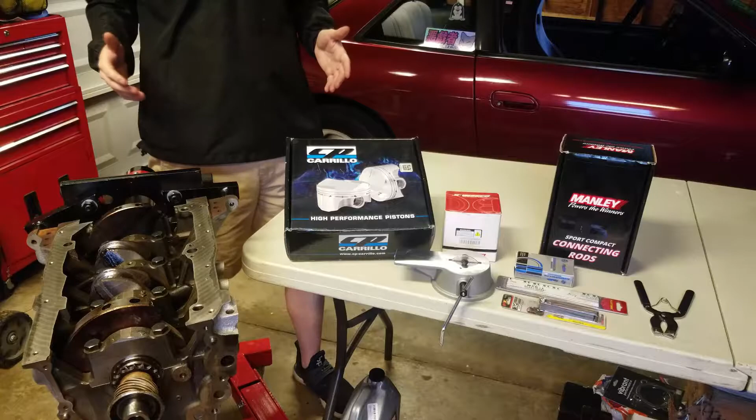This is part 3 in the KA24DE Turbo series, and as you can see we are back in the garage today working on the block that we were working on in part 1. If you haven't seen that, go check it out. We installed our crankshaft into our block and did the Plastigage measurements of the clearances between the block and the crank journals. Today we're going to be doing a little bit more of that on these Manley rods, but first

we are going to go ahead and get our rings filed for our new forged CP Carrillo pistons before going ahead and putting on these forged Manley rods onto the pistons. Then after that, once we have our pistons and rods fully assembled with our filed rings on there, we're going to install them in the block.

Hopefully by the end of today and the end of the video, we can get some beauty shots for you of the CP Carrillo pistons moving up and down in the cylinder bore of the block. So I think that about wraps it up for what we are looking to get accomplished today. Let's move right into a scene. We're going to be opening up this box of CP Carrillo pistons and getting into our rings.

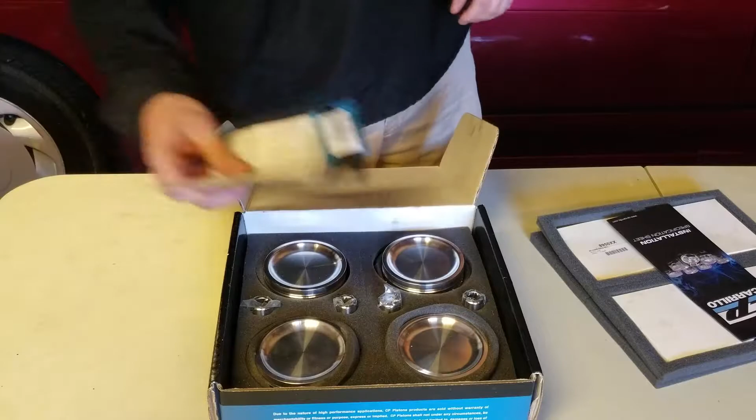The only thing that we need is our installation specification sheet and our rings so that we can go ahead and get those filed. So put away this box, get our rings out, and start working on finding these measurements and get these rings filed. We will see you in a second.

Alright, we have gotten our ring packages laid out on the table, and as you can see, we've gotten things organized in a manner that makes sense to us. So from the front of the engine to the back, we have 1, 2, 3, 4. These are the cylinders, and on the left side over here, we have top, second, and oil. This will associate to each ring so that we can lay them out and stay organized. On this same sheet as well, we have the clearances that we are aiming for on our ring gaps.

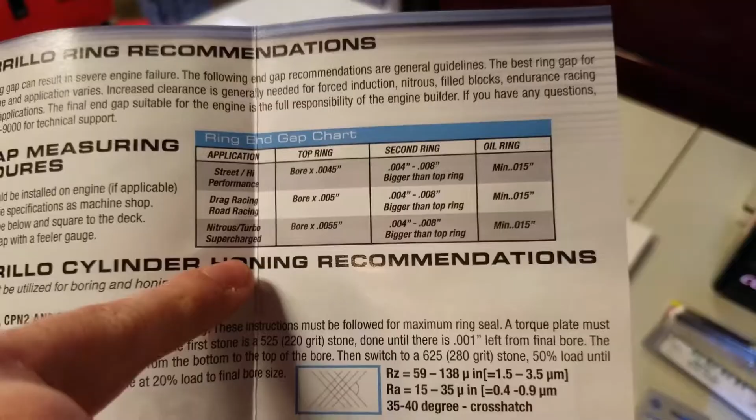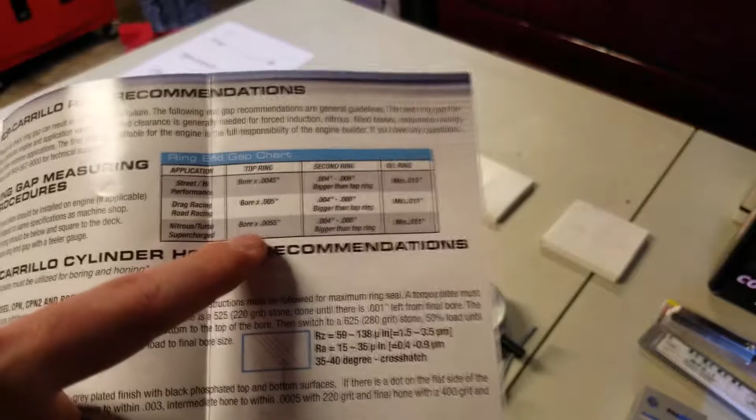And in order to find those clearances, as we stated before, we came to this little bit of the installation spec sheet paperwork. And as you can see, we will be working with a nitrous/turbo/supercharged installation. And to find our top ring gap, we would take the bore size of the engine in inches. You have to convert the bore size from millimeters to inches. Make sure you do that, because if you do not, this measurement will be incorrect. So take your bore size in inches times 5.5 thousandths, and that will give you your top ring clearance.

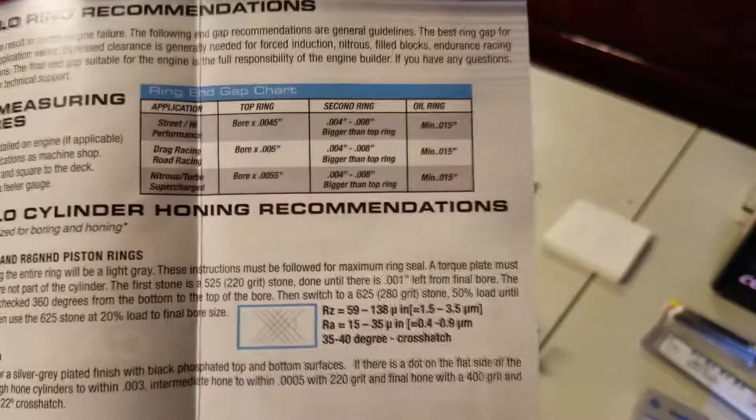For the second ring, just add anywhere between 4 thousandths and 8 thousandths to the size of your top ring, and that will be the size of your second ring. We went with 6 thousandths right in the middle, so we hope that will be perfectly fine. And then for your oil ring, a minimum of 15 thousandths is what you will be looking at for the clearance on that. So with that aside, we can open up one of these packages to see what is inside.

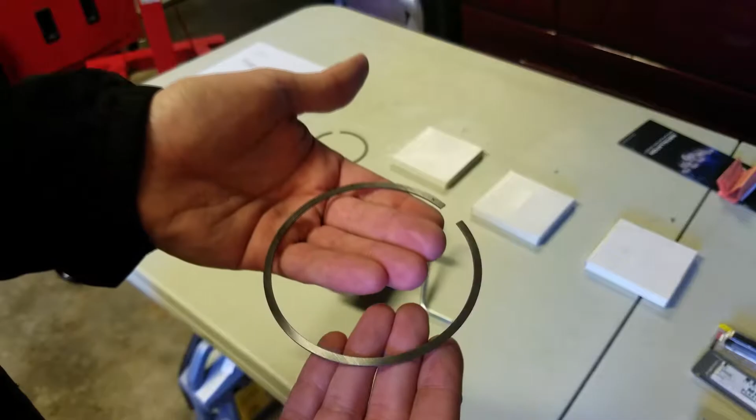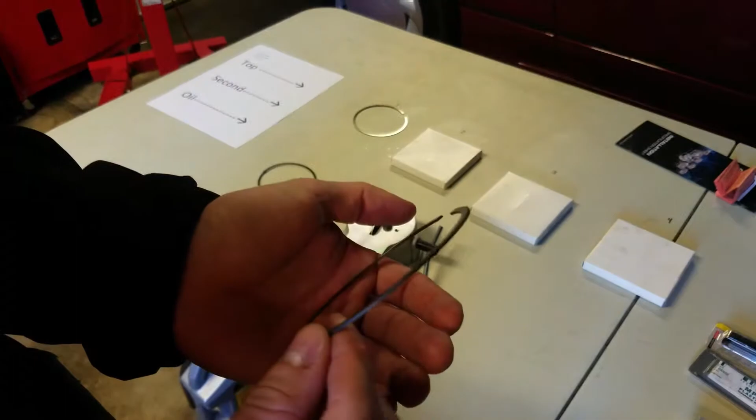So with the camera off, we went ahead and confirmed the rings are what we thought they were. This shiny ring is our top ring, and from what we understand, this is non-directional, so it does not matter which way is up when installing these onto the piston. The much thicker ring and the more dull ring of the bunch, it almost has like a graphite or graphene finish to it. This is our secondary ring.

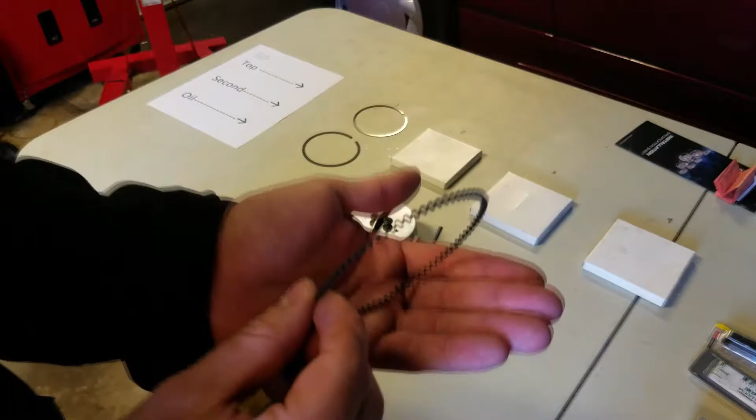Our third ring, hard not to distinguish from the others, is our oiling ring. And then lastly, we have these two very thin rings. These are what are known as oil rails, and these go on either side of the oiling ring.

So now that we have this set up in the way that we want to organize them, let's go ahead and move to getting the gap correct on this top ring. So these come gapped from the manufacturer, but we need to double check their specs. Typically, you will have to do some filing on these rings. Sometimes you can get lucky and they will be in spec, but let's go ahead and make sure it is.

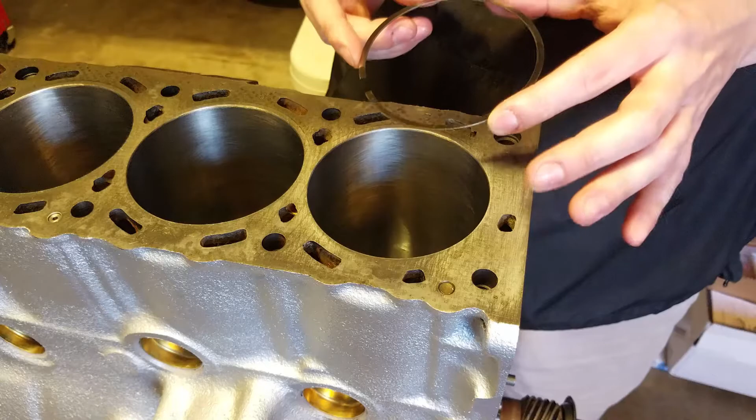So in order to install a piston ring for measuring the gap, simply push one side of the ring up against the cylinder wall to compress it, and while doing that, very, very gently push it down into the lip of the cylinder bore until it holds on just like that.

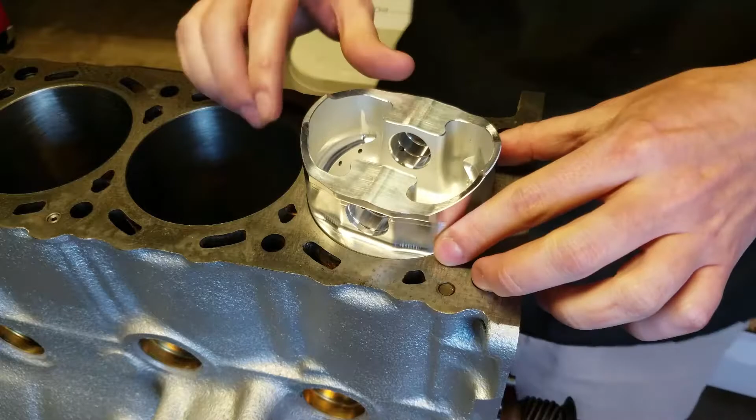With the ring compressed in the cylinder wall, we can take our new pistons or old pistons, it doesn't matter. We simply want to put it on top of our ring like that and push it down into the cylinder bore about an inch. And you want to make sure and go around the entirety to make sure that it is square in the cylinder bore.

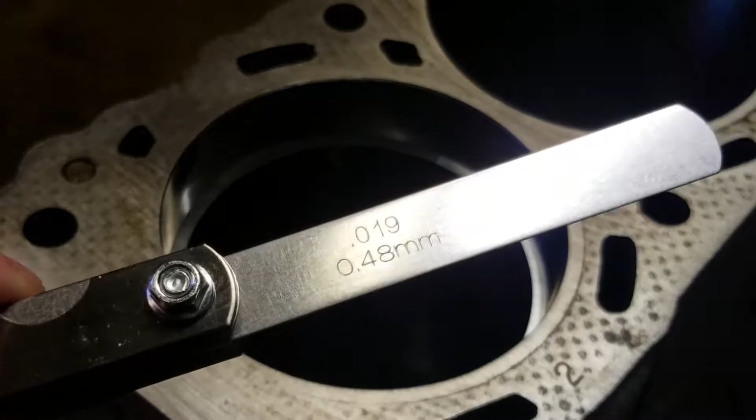Now, with the ring properly installed into the cylinder bore and ready for us to take a measurement, we'll go back over to our piece of paper and see that the top ring requires a 19 thousandths gap. With that in mind, we can get our feeler gauge and see we have the blade for 19 thousandths.

We'll simply attempt to slip this blade in between the gap right here on the piston ring, but as you can tell, we simply cannot push this feeler gauge blade into that gap, which means that we need to file it down some.

So getting ready to file this top ring to the specifications that we need, we're going to go ahead and show you some techniques that we picked up while watching some Real Street Performance videos. A lot of the knowledge that you will hear throughout this entire engine build series comes directly from them. They have a track record for really well-built engines and really fast engines, so that word is kind of the gospel for me at least.

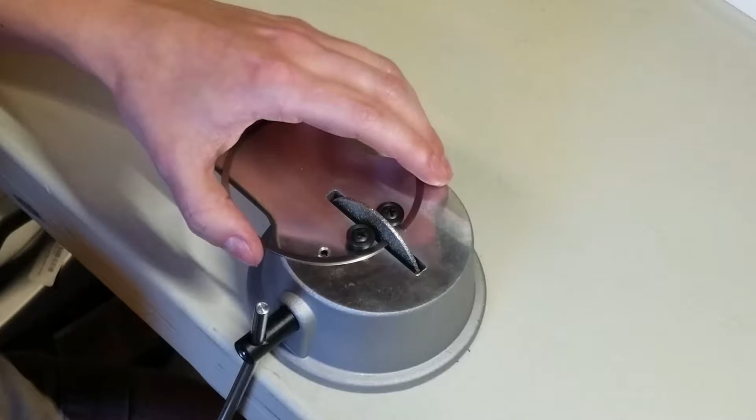The correct orientation for a ring to be filed is to place the gap over these two pins right here, then pull it back against it for support. When filing rings, you don't want to compress these two edges into the ring filing disc. Instead, you want to simply rotate one side of the ring so that one side is being filed. You don't want to file both sides, only one side of the ring.

Make sure this side of the ring is squared up as best as possible with the filing disc. And when filing, you do not want to rotate the filing disc away from the ring. You want to give the ring as much support as possible and file towards the ring as you are loading it up against the filing disc.

So we'll really quickly show you what that looks like. Simply hold the ring up against the filing disc and rotate it back, putting very slight pressure on the ring itself.

And now with that done, we can go ahead and take this back over to the block to square it up inside the cylinder bore and check once again with the feeler gauge if we have the correct specifications. So just like we did beforehand, we'll load it up on the side of the cylinder wall, being careful when compressing it. Only catching the lip just enough. Square it up with our new piston.

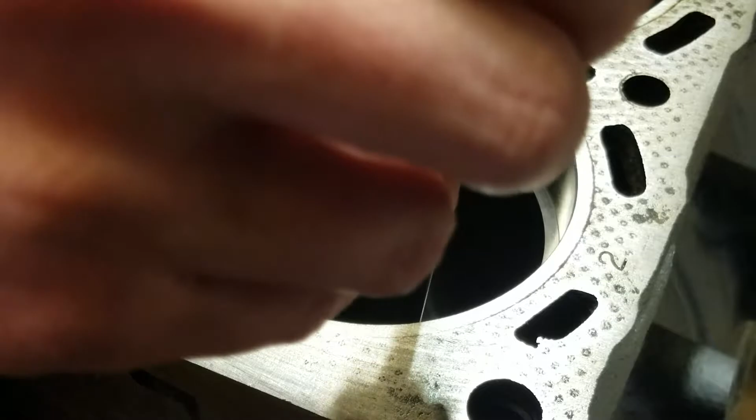And then once again, we can check with our feeler gauge whether or not that gap is correct. And it is not. We're getting close, but it's not there yet. And unfortunately, this process is very tedious.

You want to take away little bits of the ring gap at a time, or else you're going to overshoot it, and then you will have to purchase a new set of piston rings. And from what I'm aware, they're not that cheap, so it's definitely a bummer if you go ahead and smoke one of these piston rings. So we're going to go ahead and do that filing process a few times.

Then in a few moments, we will show you what the feeler gauge looks like and how it should fit in the gap with a correct clearance. Okay, so we've made about a dozen trips back and forth while getting this top ring right here gapped properly for this piston.

But a word of caution to those of you who may be doing this and using this video as informational. I accidentally went a little too ham on this ring and gapped it about 1/1000th over on this cylinder bore. So luckily, because we know that all of these cylinder bores, even though they were brought to a machine shop, are going to be still a couple thousandths out from each other. At least there's going to be a difference of a couple thousandths between each cylinder bore.

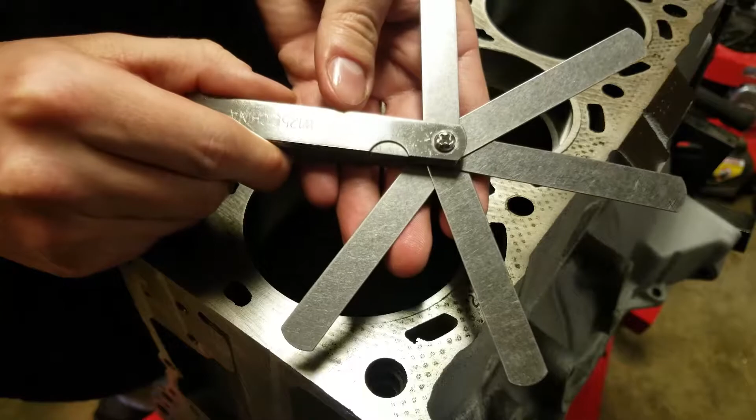Luckily, we were able to take this to cylinder number 2, do the exact same thing, and install it in here with a little bit of persuasion and a squaring up of a piston. And as you can see, we've also taken out a bunch more blades on our feeler gauge so that next time we do the top ring on this first cylinder, we can sneak up on it a little bit better.

So now this piston ring on cylinder number 2 is 18 thousandths. If I can get the light to reflect correctly, there we go. Our 18 thousandths feeler gauge is comfortably sliding into the gap on that piston ring, but our 19 thousandths right here is not. So we are just right on the edge of having that clearance to what we want for cylinder number 2 instead of cylinder number 1, because we went about one thousandth over.

That's very hard to say, thousandths.

Anyways, yes, we went just a hair over on cylinder number 1, so we tried it in cylinder number 2, and it seems to work. Even though a thousandth may not actually be that detrimental, it's still worth trying a different cylinder to try and get everything as right as possible. So we're going to go ahead and get cylinder number 2's top ring to its specified clearance, and then we'll get right back to you.

Okay, this should be our last trip to getting the clearance on this ring. Go ahead and compress it. There we go. Try not to bind it. Square it up with our piston. Like that. And if our gap is correct, we should be at 19 thousandths. Yeah, that did slide in pretty easy though. 20 thousandths.

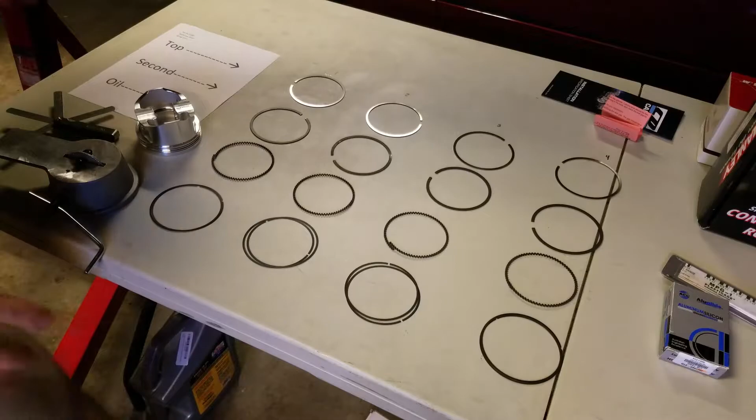Okay, and as you can see, I have laid out all my rings in the manner that I want to keep them organized. And because the second cylinder top ring is the one that we just did on accident, but it is clearanced, I'm just going to go ahead and put a dot in the center of it with a Sharpie to let myself know that I am done with the gap of that ring.

Now, there's quite a few more rings to do, and I'm definitely not going to keep this in the video. I may do a little bit of a time lapse, but what you just watched me do with this single ring is what I have to go and do for all of these rings. Super tedious, but of course has to get done, and it has to get done precisely, and we're just going to jump right into it. So time lapse or not, we'll see you on the other end once all of these are precisely gapped and we are ready to install them on our CP-Carrillo pistons.

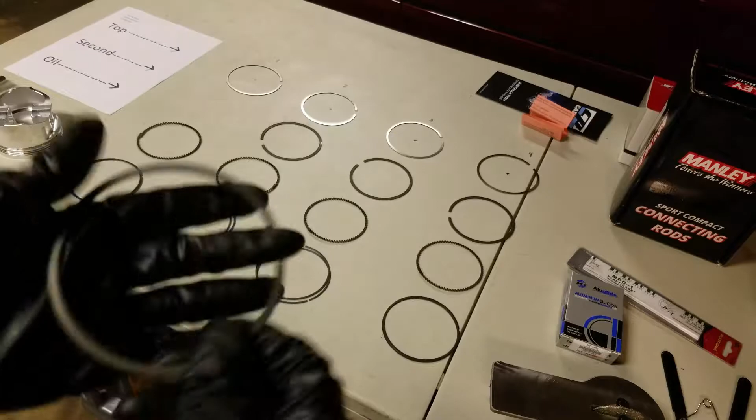Okay, so the top rings for every cylinder have been clearanced correctly, and we're just about to move on to our secondary rings. Something to keep in mind, and the reason that we're making this quick little segment, is that these rings are supposedly a lot softer than those top rings. So because we got a little ham on the first ring that we were doing and had to move it over to this second cylinder, just wanted to reiterate that these are going to be softer, so you need to be even more careful with the secondary rings on the KA24DET application when doing the clearancing of this.

So, just a little tidbit of information. Wanted to let you know so that you don't smoke these completely and end up having to buy new rings.

So next step for us, get all 4 of these secondary rings gapped, and these will be gapped to 25 thousandths of an inch. So go ahead, get right into that, and then we'll get back to you with these oil rings when we're ready to do them, because we have some questions about that, and we'll be looking up some information about that so that we can relay it to you in the next segment.

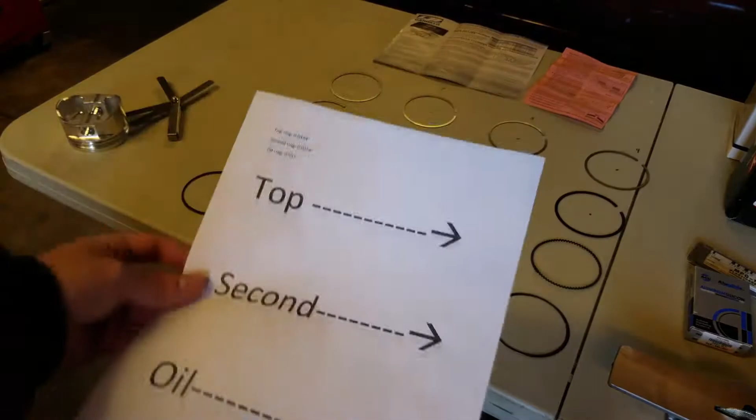Okay, so there was a bit of a jump in time between the last clip of the video and right now. As we sit, we've gotten our top rings clearanced, our secondary rings clearanced, and we stopped there because we had to go online and look up a little bit of information. As for our oiling rings and our oiling ring expanders, you can see that we are aiming for, it says minimum 15 thousandths gap, but we went ahead and put a 17 thousandths gap just to be safe.

We wanted to look that up because we were not sure whether or not we had to gap these little oil expander rings, and it turns out that you do not. It's also a good thing that we looked that up, because in the same time we learned that these oil rail rings apparently typically do not have to be gapped. They are so thin and are such a hard material that they are hard to gap if they need to be. And typically, if you do need to gap these rings to anything over 15 thousandths, then something is wrong, more than likely, with the machining of your block.

So we're not going to mess with gapping these. We're just going to put them in the block right now, one by one, check to see if the clearance is at a minimum of 15 thousandths. And if they are, then it looks like we can begin to assemble the rings onto our pistons. So we'll go ahead really quick, check on these oil rails, and then we'll get right back with you.

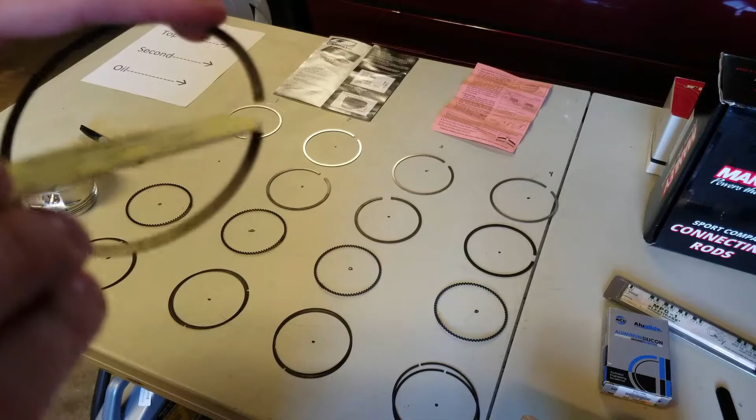Now you can see by the dots on all of the oiling rail rings on the table here, we've gone ahead, checked the clearances for those, and they check out. We went back through every single ring and double checked with our feeler gauge that all of our clearances are within spec. And then to finalize things, we just took this nail file and very, very gently went over the edges that we filed down and sanded the edge off of them that was created while we were filing them.

While we were doing that, we noticed on our secondary rings, and this is going to be interesting whether or not the camera will be able to pick this up. So let me come in close here. All right, so not sure if you can see that, but on the outer edge of the secondary ring, you can see that very fine hook. If the camera will focus, this is a very hard thing to get to focus, but there we go.

That little hook on the edge of the ring, that is called a Napier hook, and it is in the documentation for the CP Carrillo rods that we got. As you can see right here, Napier hook on the secondary ring, and it tells you which way is up. So beforehand, we didn't think that it mattered which direction these top and secondary rings faced when going in the cylinder, but thankfully we noticed that on filing them down, because it says right here in the documentation that if you install the second ring upside down, it will pump oil into the combustion chamber.

So it does help to do your due diligence and go over with a file, and just make sure to be very detail oriented when putting together an engine. That was such a small thing to notice, and we're super glad that we did. Otherwise, we literally would have been taking this engine back apart in the future.

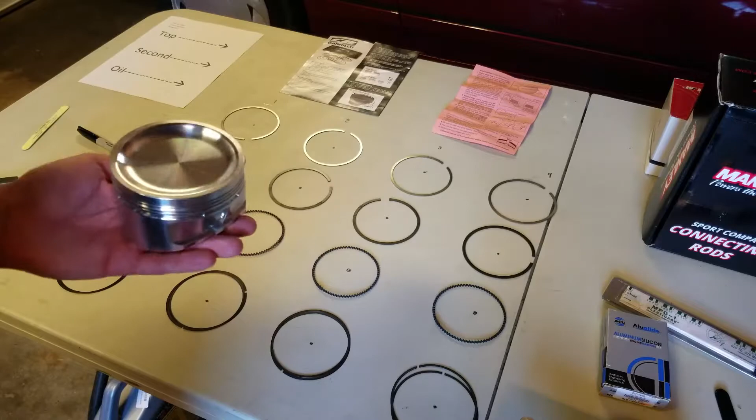And with that being said, it is time to do that. So we're going to go ahead and off camera do one of these pistons on our own, just to kind of get a feel for it and see whether or not we'll be able to do it in a fluid manner for the camera. So in just a second, you'll see our rings put onto our first piston, and then we'll show you exactly how we did that.

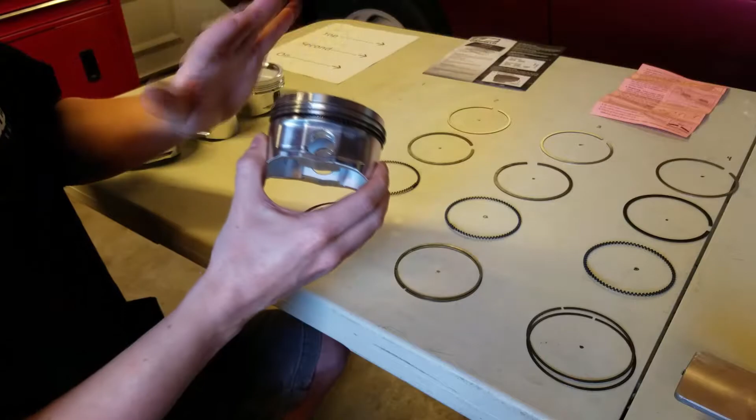Okay, so we have the rings on our first piston here, and they went together pretty beautifully. The oiling ring expander, or the oil rail expander, whatever you want to call it. As you can tell, I'm also learning during this process, so if terms get swapped around and whatnot, I apologize, but trying to get stuff done while informing you at the same time, so it can get a little bit confusing. The oil expanding ring was probably the hardest to get on in terms of getting it on correctly. So we'll go ahead and start with that.

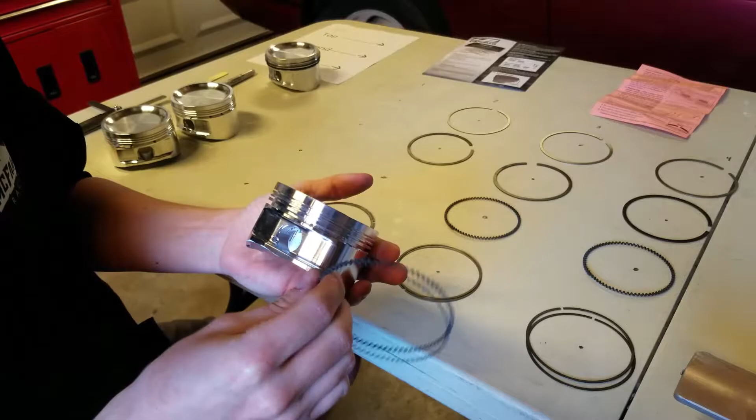Take our bare piston, and we'll take our oil rail expanding ring. Something to keep in mind when you are putting this onto your piston is to make sure that these two ends, you don't want them to overlap like this. You want them to butt up against each other just like that. So we'll go ahead and get this one on first.

I do have an oil ring expander, but after watching Real Street Performance put these on with just their bare hands, honestly, it was easy enough for me to do with this first piston, so I would say to not even mess around with an oil ring expander. With your hands, you can feel how much tension you are actually putting on these rings and whether or not you are on the cusp of breaking them as you install them.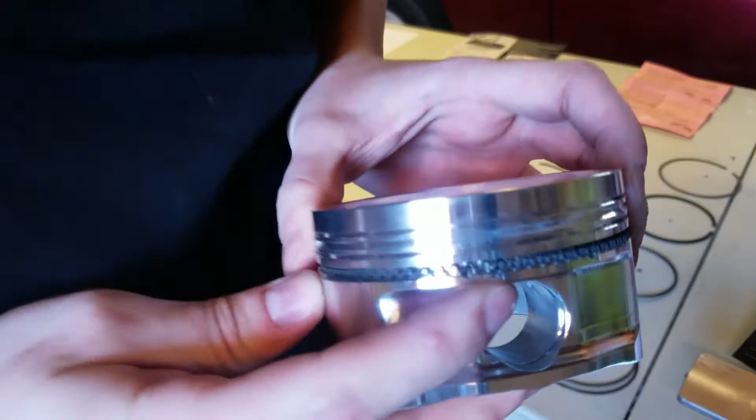So what I did for the oil expander ring was to just bring this edge down into the groove that this sits in, and just rotate it around the piston with your finger until it slides down into its groove. As you can see, it is currently overlapped right here, so you just have to push it aside until it butts up like we were talking about earlier. You can see right there, it's butting up.

It's not overlapping. With the expander on, we can move to our oil rails, and same thing, we just want to bring that edge down underneath the expander in that groove, and then slowly rotate the ring around the edge of the piston, making sure that the edge of that ring is staying seated inside of that groove. And then you just simply pull it around the piston and underneath that ring.

And you can see it'll sometimes get caught on the grooves as it's going down. You can just pinch it and pull it down until you seat it properly under that expander. And there we go. Sometimes it'll take a little bit of finagling, but as you can see, hopefully that lower oil rail is installed underneath the expander. Now we can go ahead and install our top oil rail.

Same thing with this, we just want to get the oil rail, get the edge of it right above that oil expander and push it down into the groove, just like that. It's a little hard to do on camera, but we got it in there. And then just slowly rotate this ring around the edge of the piston. And try to keep this edge off of the piston as you bring it down onto the groove, because it will mar the piston a little bit. Not sure if that's detrimental, but definitely nice to think about when putting it on.

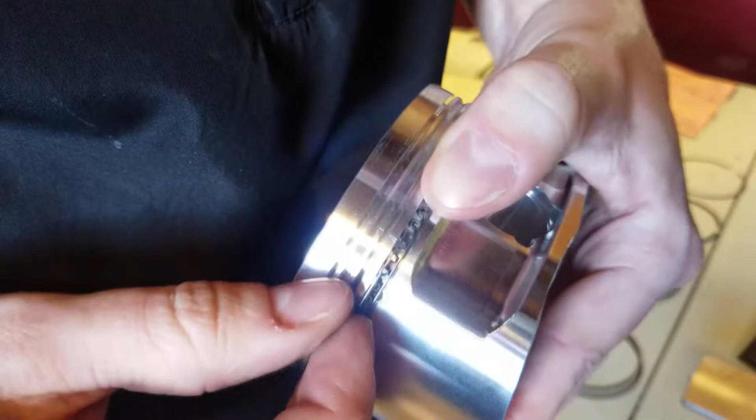And then this top ring should just slide right down, and there we go. So now we have our two oil rails and our oil ring expander between the two. Now we can move on to our secondary ring. There are 3 grooves in the piston, and this confused us for a second, but the middle groove here is tapered and not where we want this second ring to go. We want the second ring to go down onto the very bottom of these 3 grooves.

Same thing as the oil rails. Just catch it in that groove there and be very gentle with pulling it around the piston, because this is more brittle of a rail than the others. Try and pull this edge over. See, we marred the piston just a little bit, unfortunately, but try and pull that down into that third groove, just like that, and then the ring should seat in that third groove.

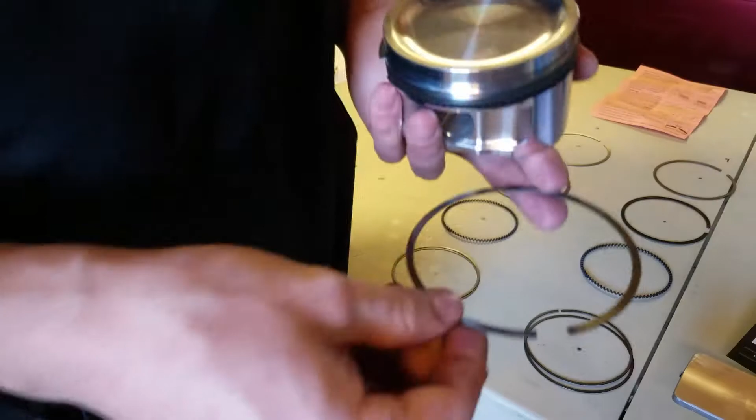Once it's in, give it a little spin, make sure it is moving properly in there. Same thing with the oil rails as well. Make sure everything is moving nice and free, otherwise you may have some burrs or some other nastiness that became of the filing process or just from manufacturing in general. Finally, we have our top ring, and we will just set that into the topmost groove of the piston. Walk it around.

And set it into that groove, just like that. It's pretty easy. It'd be a lot easier to do it off camera, as was that first piston. But yep, that is the rings installed on our pistons. And again, just make sure everything's moving freely.

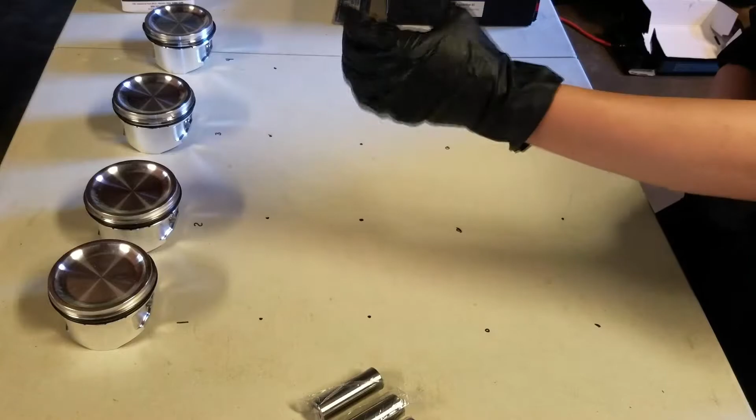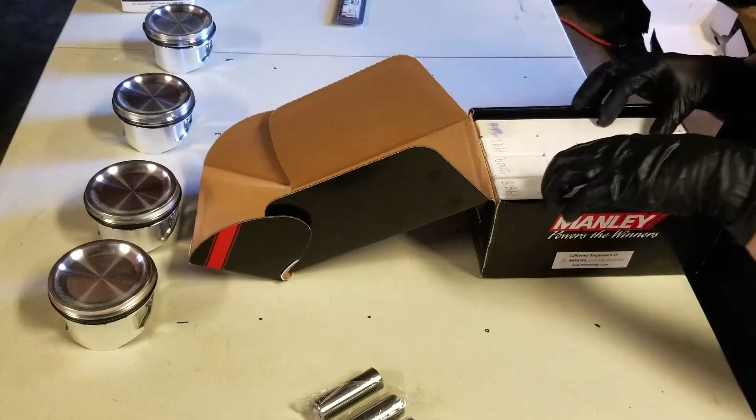And there is a direction in which you want these gaps to sit before installing them into the block, but we'll show you that when we get to it. For now, we are just going to install these last 2 ring sets into our pistons and get ready for our connecting rods. All right, so we have got our piston ring packages put onto our pistons, and now we can go ahead and move to getting these Manley Forged connecting rods installed on them.

These are an H-beam design and are pretty tried and true from what I'm aware for turbo applications. And they come with ARP hardware already installed, so that is nice as well. Very nice looking. So we need a connecting rod. To connect it to our piston, we need a wrist pin, and then we need 2 retaining rings that also came with these CP pistons. So we'll get these out of their little bag.

And then we will also use some of this engine assembly lubricant to put on this pin as we install it into the piston. Alright, so with all of our stuff laid out here, we can go ahead and install this end of the connecting rod into our piston, just like that. And we'll lay it down just for a second.

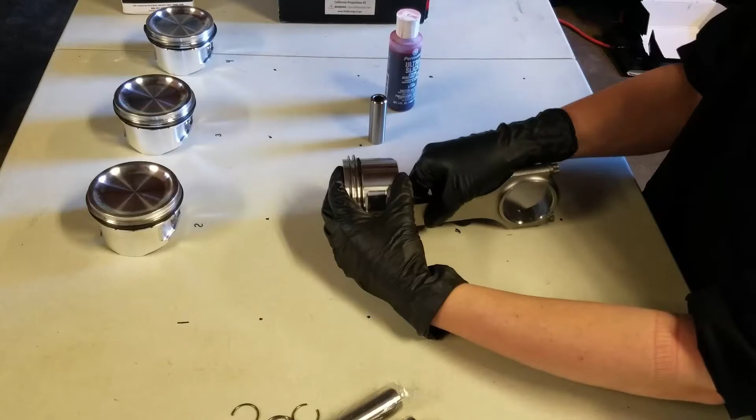Then we can go ahead and take some of this engine assembly lubricant and just apply a very small amount to this pin and get it nice and lubricated before installing it into our piston. Just like that. There should be absolutely no resistance. And then finally, install your retaining ring into the bore where that wrist pin is located.

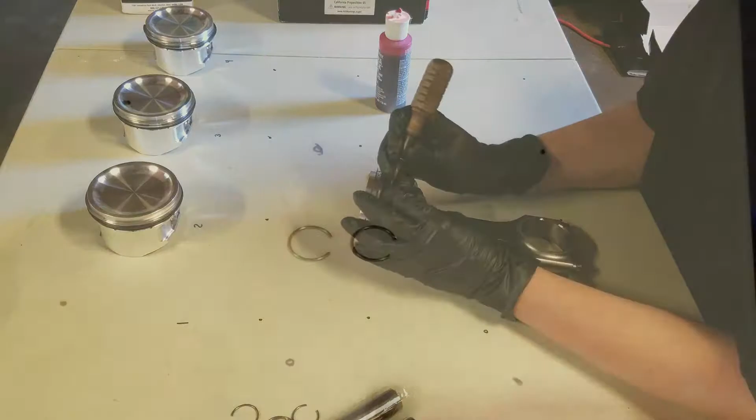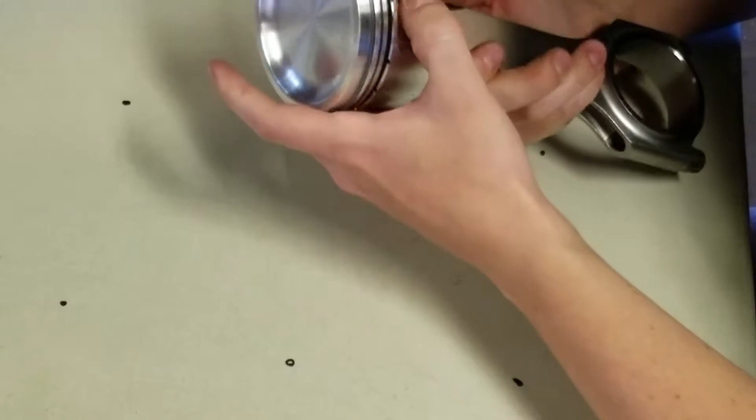Okay, we managed to get these retainer rings installed in our piston, but not without marring up the skirt of the piston a decent amount. It's actually kind of disconcerting, but we are going to treat it with a little bit of sanding just to make sure that no burrs or any nastiness falls off in the cylinder bore as we are running the engine.

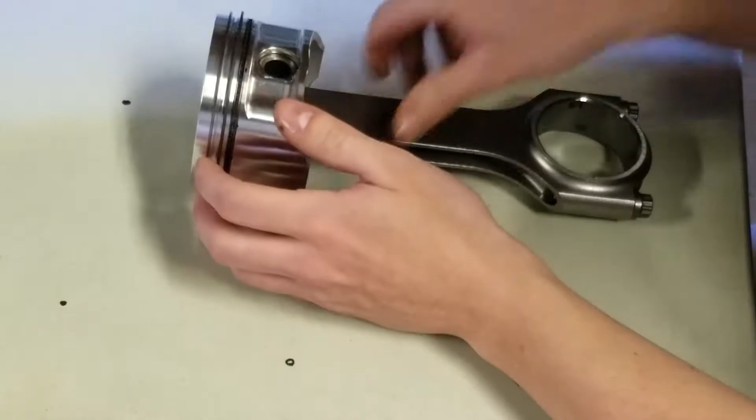That being said, it would probably be a good idea to go to a different video to learn some techniques on how to put these retainer clips in. We just watched a video after having messed up one of these sides, but even still installing with the technique that we've seen from some other YouTube videos and some engine building experts, the technique is really hard to get used to, and we still did a little bit of damage while installing the other side.

So we're going to go ahead and do a time lapse on these other 3 pistons as we install the connecting rods into them. We're not going to show us putting in these retainer rings because our technique is just so bad. We do not want to glorify the work that we are doing installing those.

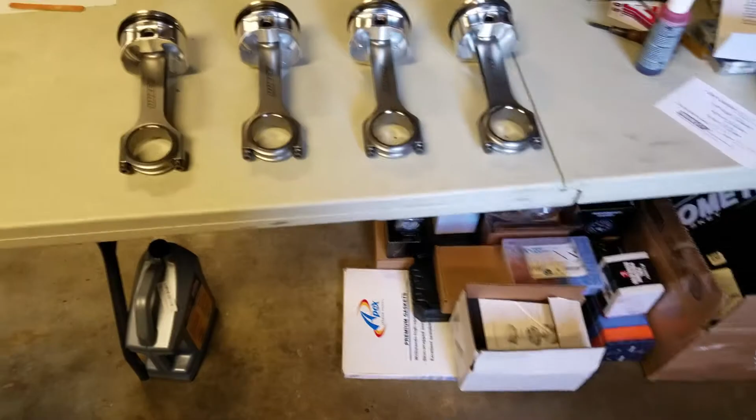Okay, apologies. The phone actually died while we were getting the retainer rings put into the wrist pin bores. That was a whole process. There was a lot of cursing, and really that footage is not something that I would really want to put on the channel anyways, because it was very, very frustrating.

So at the end of everything, as you can see, this is the first one that we did, and we got this pretty bad mar right here next to the bore of the wrist pin. But as we moved along, a little bit of marring, and then we slowly figured out the technique. So that little bit of marring right up there is all that we had, and you can't even really feel that with your fingers. So we're a lot happier with that last one that we did.

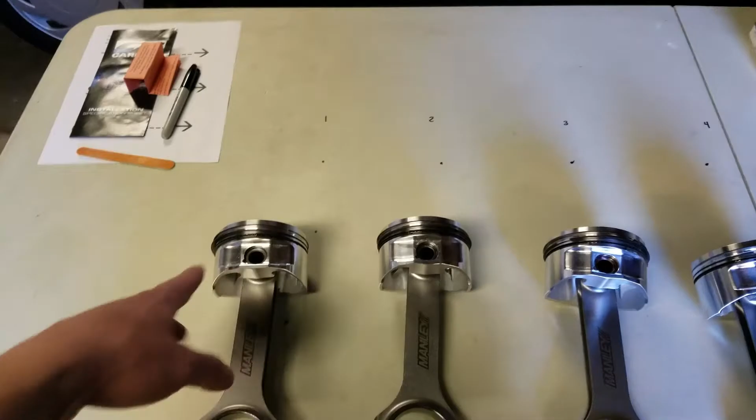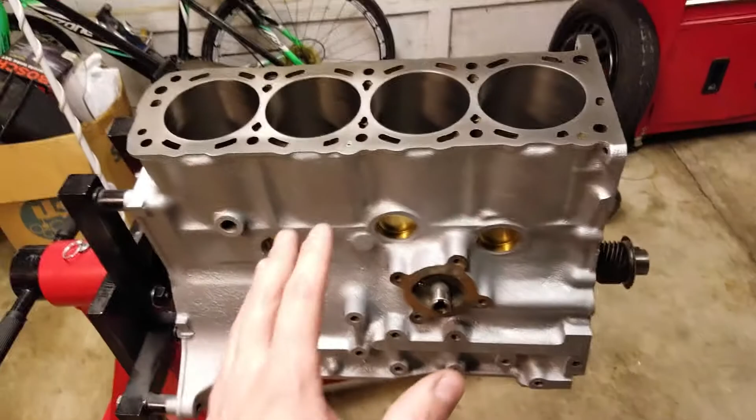But as you can see, we now have our pistons with rings that are properly gapped installed onto our forged connecting rods. And then finally, we can go ahead and get the bearings on these connecting rods for a final Plastigage clearance check. And then after that clearance check, we can torque down these connecting rods, and we will finally have a full rotating assembly in the block and ready for those beauty shots that we mentioned at the very start of the video.

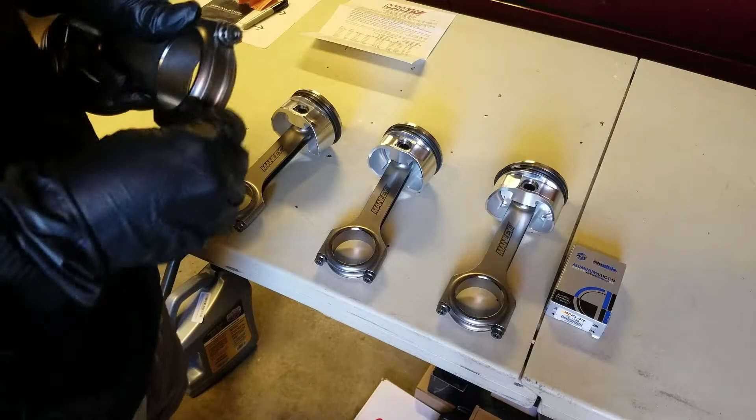So let's go ahead and get our bearings onto our connecting rods. If you watched part 1 of this series, then you're probably going to have a little bit of deja vu in regards to installing the bearings on these rods. So we're not going to get too detailed on this, but we will still show you the process.

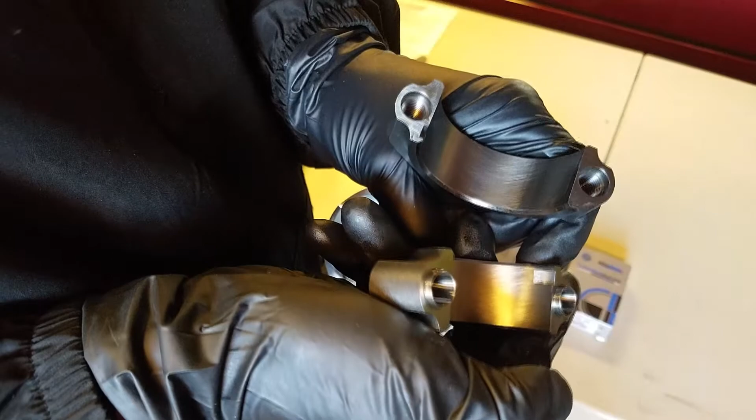These rod caps are held in with some little locating pins, so they can be a bit of a pain to actually get off of the rod. So just give them a wiggle. There we go. Just give them a wiggle when you are taking them off, and you can see those little locating nubbins or pins or whatever you want to call them. Just like when installing the main bearings in the block in part 1, you can see right here and right here these little indentations in the rod where the bearings are set.

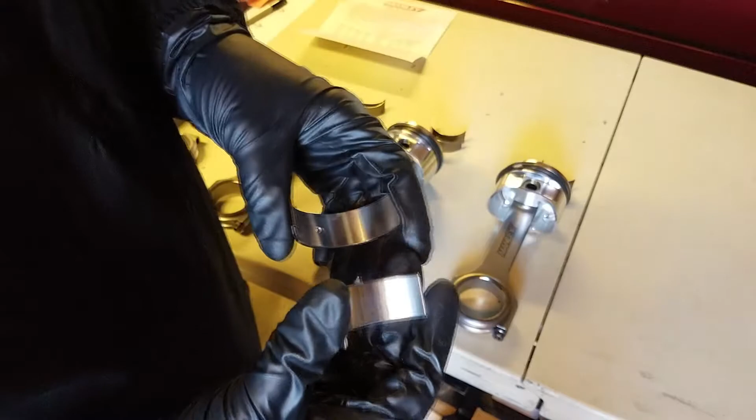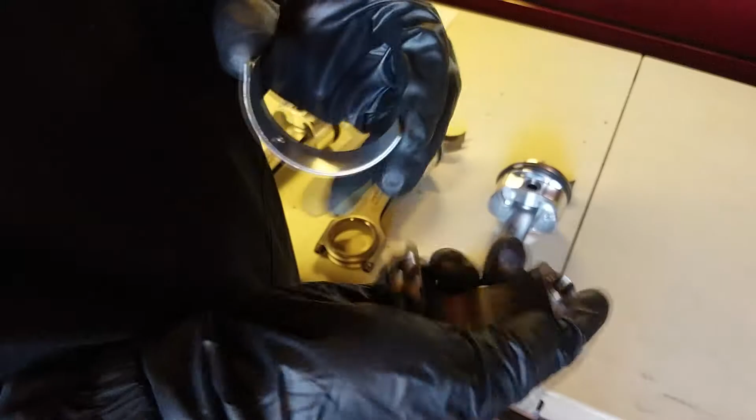Go ahead, get our bearings out of the box. Get these open. And there we have it, 2 bearings for our rod. This will just simply click into place, just like we did on the main bearings. Just like that. Then likewise with the cap, just find your indentation on it right there and install your other bearing.

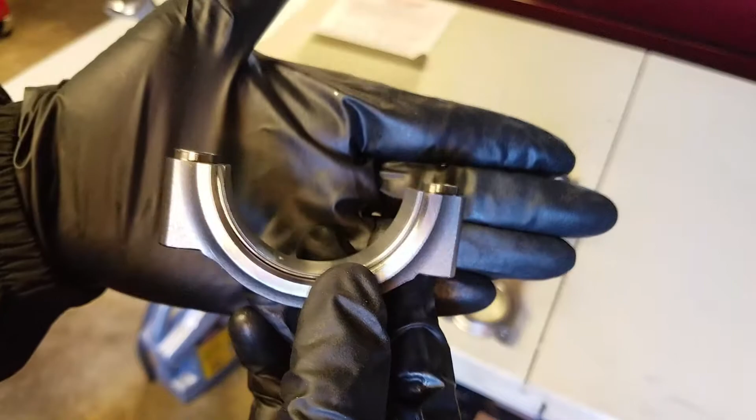Try to make sure that it sits as flush as possible with each lip, but that really doesn't matter because as you bolt down both sides of this to each other, it will self-locate inside of the groove of the rod. But it's best to have it as centered as possible just to make sure it doesn't do any weird binding when you are bolting them together. So it really is as easy as that.

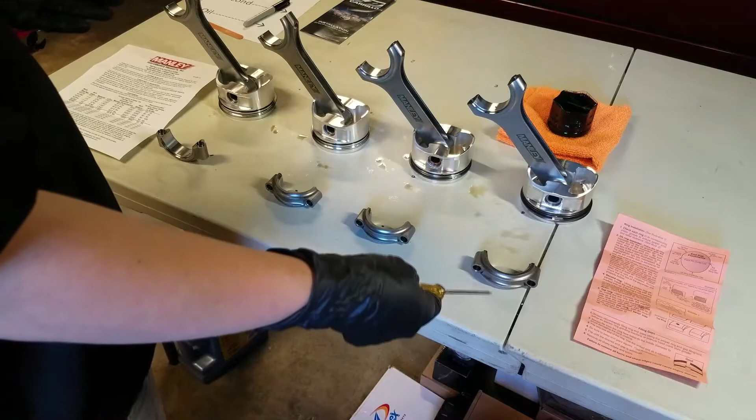Again, if you've seen part 1 of this build series, you've seen bearings installed. So we've already gotten them installed on our first piston. We'll go ahead and get them on these last 3, and then we'll see you in just a second. So we have gone ahead and gotten the last of the bearings installed into our rods and our rod caps.

As required by the Manley performance documentation, we needed to soak the ARP hardware that came with this rod set in some 30 weight oil. So that's what is in that container right there. We have our hardware and some 30 weight oil in that container.

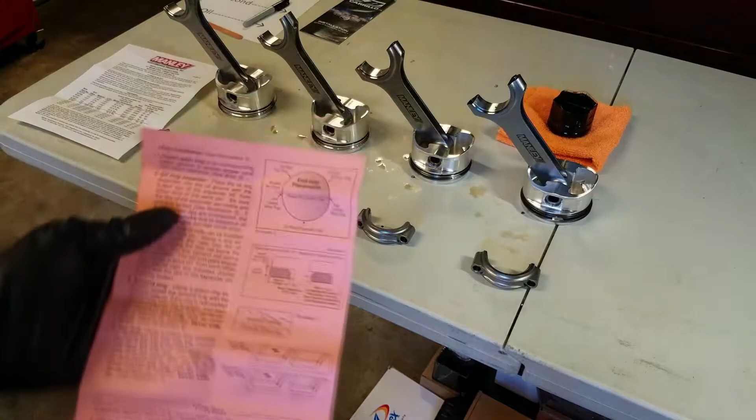Because we will only be potentially installing these pistons into our block a single time if the clearances on these caps check out, we need to think about setting the end gap placement on our pistons. And if we go over to this documentation that came with these CP pistons, we can find this diagram to show how to do that.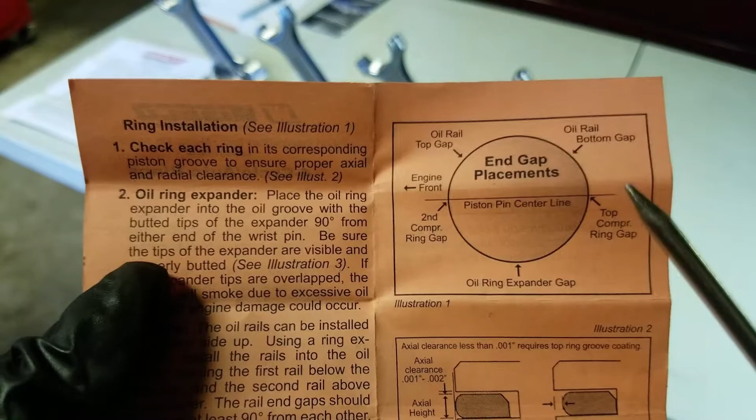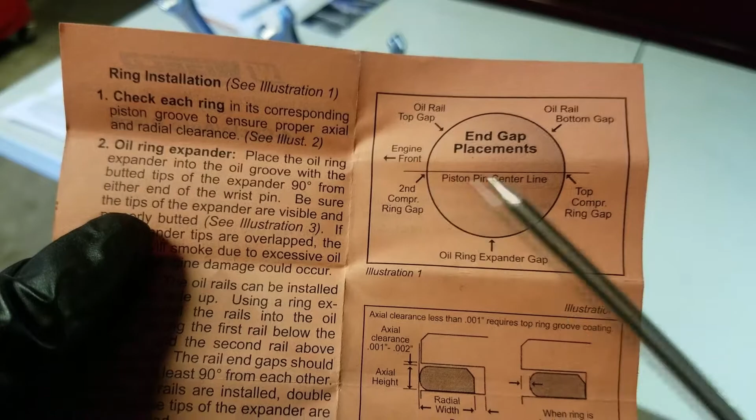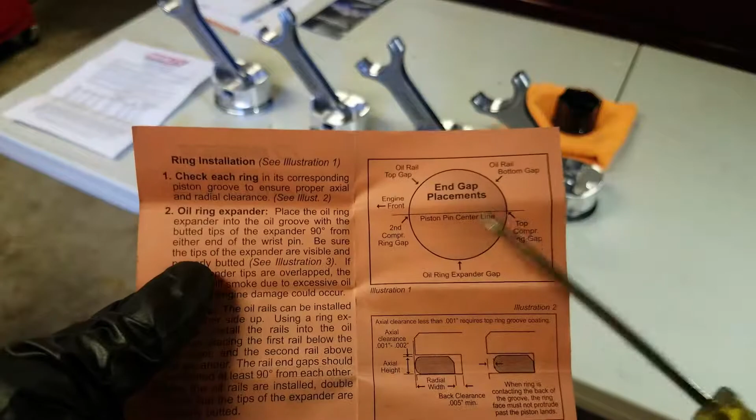You can see that in reference to this being the front of the engine, we need to have our oil rails at about a 90-degree offset of each other. The oil ring expander will be at the very bottom of our piston. And then the top and second compression rings will be 180 out from each other. So we'll get our first piston over here so that we can show you how to orient those. Okay, so let's go ahead and get the end gap placements done on this first piston.

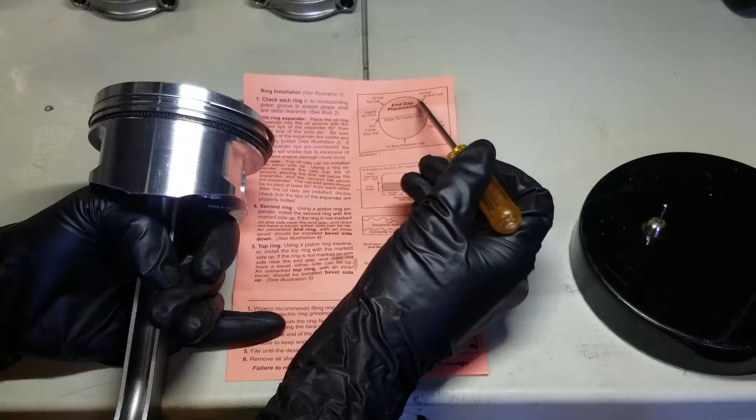We're going to say that the side of the rod with our logo is going to be engine front. So we'll just rotate the piston like that. We're going to do our oil rail bottom gap orientation first. In reference to us having engine front over here and considering straight up would be about 12 o'clock, we'll say that oil rail bottom is about 2 o'clock in our positioning. So right here, whether or not you can see that gap is another thing, but trust it.

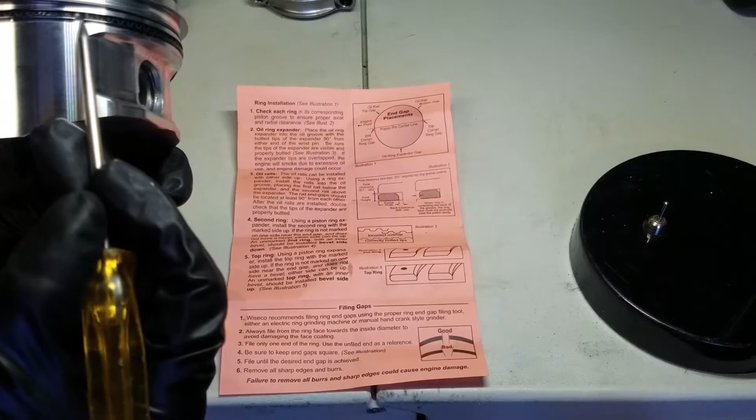Yeah, there it is. That gap right here, we'll need to rotate that around to about, maybe a little more, probably about right there. So our oil rail gap is right here, just like on our diagram.

Now let's move on to the oil ring expander gap. That will be at directly 6 o'clock in line with our rod. So we need to find the gap where it butts up together on the piston. That is easier said than done. But if we look real hard, all right, here it is.

So this is where this pick comes in, making sure to hold the backside of these rings. You can grab that expander and rotate it, hopefully without rotating the oil rails above and below it. And we need to orient that gap of this expander all the way down to 6 o'clock.

And there we go. Again, not sure if you can see it, but you'll have to trust us. Right here is the gap, or where the two ends butt up together on the oil ring expander. We're going to go ahead and just make sure that this bottom rail didn't rotate at all while we were moving that oil ring expander, which it did. So we will have to reorient that bottom rail, and then we'll move on to the top rail.

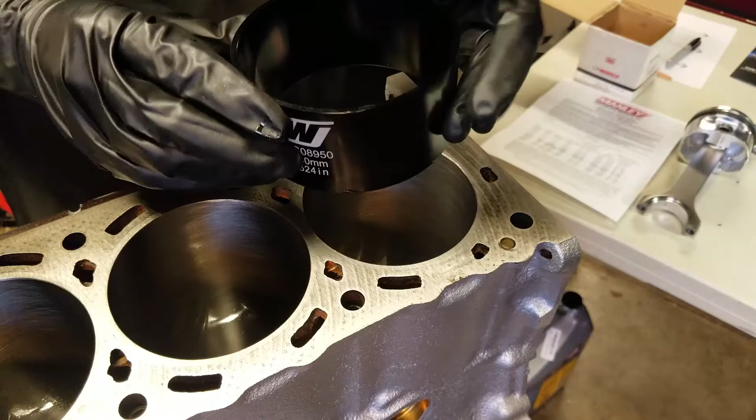Typically you'll have a cheaper tool that kind of wraps around the rings on your piston in order to compress these down to the point that you can slip them down into the cylinder bore of your engine. With those, it's very easy to not have it square on the deck of the block as you are pushing your pistons down into the cylinder. When that occurs, there is potential for one of the rings to slip out between the crevice of your tool and the deck of the block, and if you're pushing down hard enough, you will actually break that ring. And then after having gone through this entire process, you will have to pull that off and redo it all over again.

So these tools are a little bit more expensive than your typical cheaper ring compressor, and these only work for the specific bore that you are working with instead of the more universal design of those cheaper tools. But I believe this to be well worth it so that we don't smoke one of those rings as we are pushing it down into this cylinder bore.

So really simply, just place this on top of the deck of your block, and this has a tapered inner sleeve so that as you push the piston down through it, it will clamp around those rings and help it not snap them as you install your piston. So we also went ahead prior to starting this recording and lined the entirety of the cylinder bore with oil. And it's really easy. Just place your piston on top of that tool, and as you slide it down, it will easily just compress those rings.

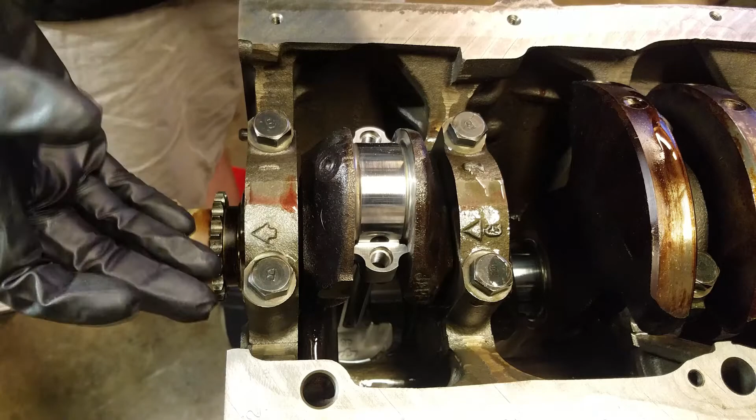Okay, so here we have the back side of our crankshaft where our connecting rod is pressed up against. And as you can see, we'll simply take our connecting rod cap and we will place it down just like we did with the caps for the main bearings. We'll go ahead and tighten this down once we get some Plastigauge on this surface, and we'll see if this bearing is in spec.

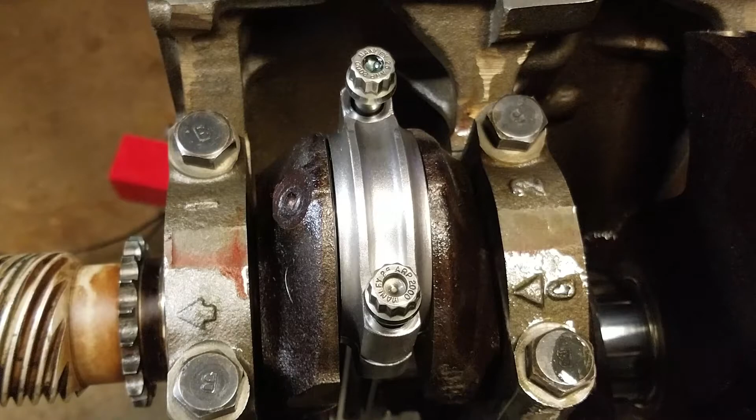Okay, so as you can see, we've gone ahead and gotten some Plastigauge on that bearing surface. We'll go ahead and we will retrieve 2 of these ARP bolts from their little oil bath. And then we can go ahead and install the cap onto our connecting rod. The final specs that these bolts need to be torqued down to is 65 foot-pounds. My torque wrench only does a minimum of 50 foot-pounds,

so we were going to do 30 foot-pounds first on these bolts, but instead we are simply going to run them down with our fingers until we can no longer turn them, and then from there we'll torque them down to 50 foot-pounds, 60 foot-pounds, and then a final 65 foot-pounds. And we'll take these bolts off, take a look at that Plastigauge, and if the clearances are correct, then we're just going to bolt these caps back down after putting some engine lubricant on both sides of these bearings and move on to our other 3 pistons.

Okay, so we've gotten those tightened to 65 foot-pounds. We're going to go ahead and loosen these off. And sorry for the quick cut there, but we had to fight to get this cap off of the connecting rod. So as you can see, there are our Plastigauge marks.

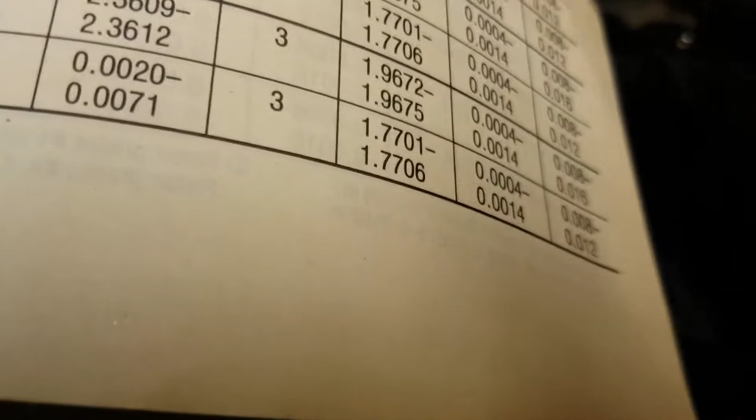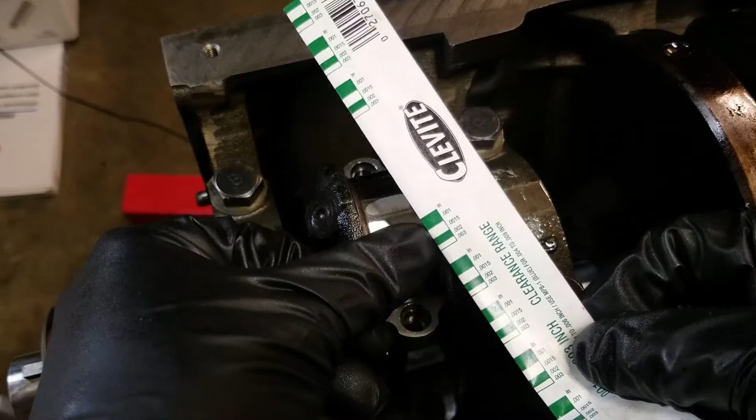Okay, so in reference to the clearance that we are looking for from our Plastigauge guide, if we come back into our manual and look at the connecting rod oil clearance for the 1989 KA24E, right here we can see that anywhere between 4 ten-thousandths and 14 ten-thousandths is a good spec. On our Plastigauge guide, the closest spec and the lowest spec that we can get is 1 thousandths.

So if we bring that up to our mark, we can see that it is a little thicker than that 1 thousandths and even thicker than that 15 ten-thousandths. So with that in mind, it is safe to say that this is anywhere between those clearances that we see in the manual. So we should be good to go on those clearances.

So finally, we are going to drop the piston out of the engine. We're going to get all of these bearing surfaces as clean as we possibly can, along with our connecting rod cap. And we will install the piston for one final time, making sure again that the gaps on the rings are in the correct orientation. And then we can finally get this first piston bolted down for the last time in the block.